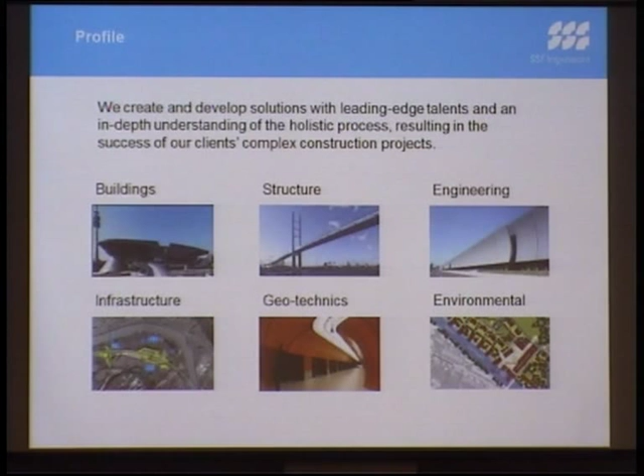These are very important markets for us. As I said initially, we are working a lot in traffic infrastructure. And for these emerging countries, I think this is one of the important facts for an upcoming country. When the economy is rising, the requirement for traffic infrastructure is an important issue. And that is why today it's very interesting for us to work in these countries.

What kind of services are we providing? We are providing services of construction from the very initial phase, so feasibility studies in the very beginning, to all the phases of a project, to finally implementation design. We have some special issues, as I already said, traffic infrastructure, geotechnics. Today also building information modeling is a very important issue for us, and check design.

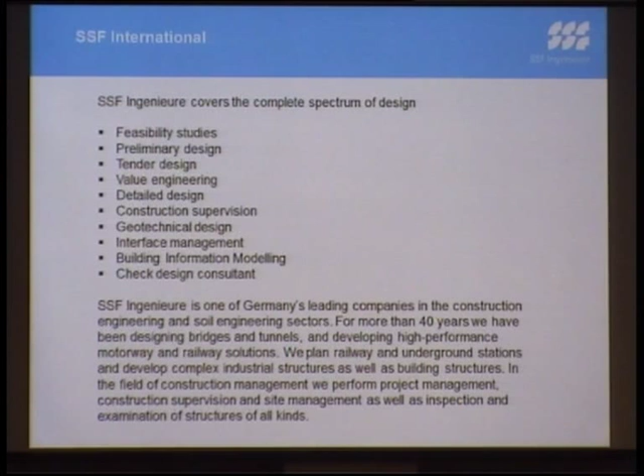And the way we are working today is in a kind of a network. We call it SSF Group. We work together with a lot of partner companies, locally in Germany, but also worldwide. We have subsidiaries today in many different countries. There's China, there's Greece, there's some of the Eastern European countries where we are situated.

And that is what we realize today is the best way to offer service to our clients, that we have a network, we can work in all disciplines of engineering, working together with local companies, also with local companies here in Russia. That is also a very big and important point for us, to realize mutually, so together with all these partners, our projects, and to supply to our clients a good service.

Now, we'll come immediately to the projects we're starting, and there I will hand over to my colleague immediately. We're starting with underground structures.

Okay, now I will show you some underground projects from SSF. The first project is two subway stations in Delhi, India. We did the design for the two stations, Malviya Nagar and Hauz Khas. The client was the Delhi Metro Rail Corporation, and the construction costs were about 120 million euro. Our services were the preliminary design of the subway stations, the definitive design of the subway station, and also the construction design of the subway stations.

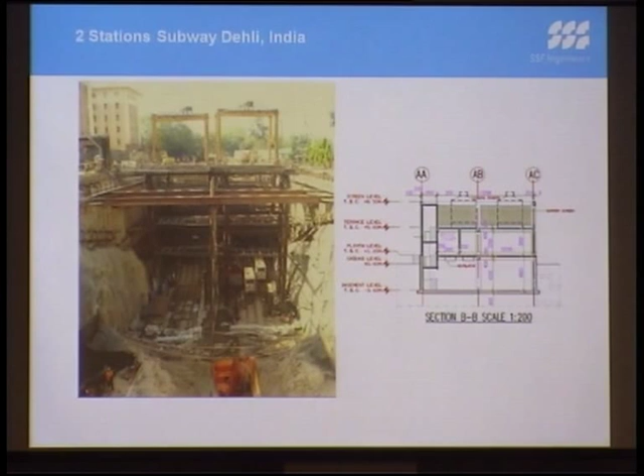Now the metro station Marienplatz in Munich, Germany. It's an existing station where there was a widening of the platform level done. It's very central in Munich, so there are a lot of interfaces with other structures. The main problem was the historical building on top of the underground station, and we had to be aware that deformations don't rise too much during construction.

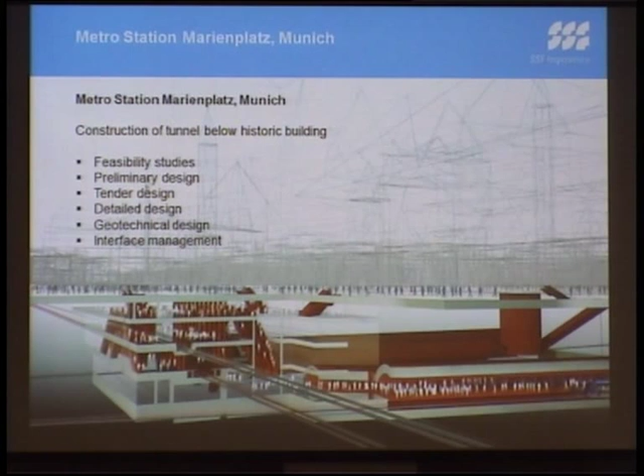Here on the top you see the widening platform, the new structure, and again the historical building on top. Under the underground you see the pilot tunnels. We had to make some pilot tunnels for the soil freezing, to freeze the soil on top of the platform widening to get lower deformations.

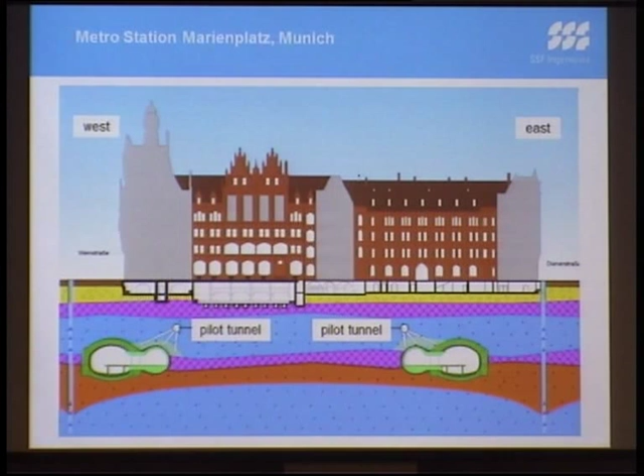Here again the structure. The Munich City Hall is the historical building. There was a start shaft done, you can see it on the right side. Then the pilot tunnel for the soil freezing, and then the soil freezing was made.

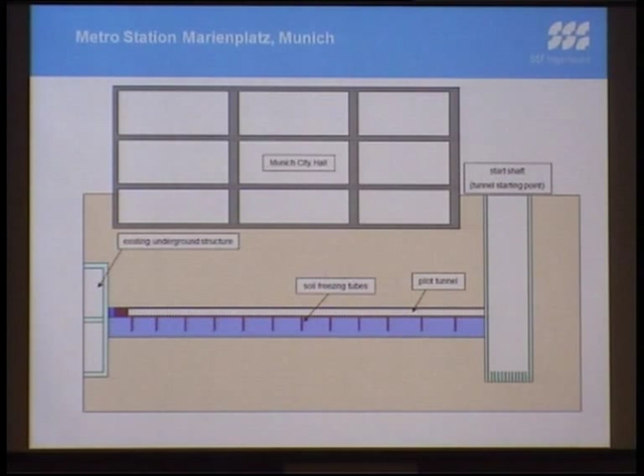You see it hatched in red now, and then under this soil freezing they excavated the new platform, the new widening of the platform.

And here you see now all the breakthroughs. The breakthroughs are from the widening platform to the actual platform level. This is now the final state, how it looks today. This is the widening platform, and behind these black breakthroughs is the actual platform level of the underground line.

The construction costs were about 25 million euro.

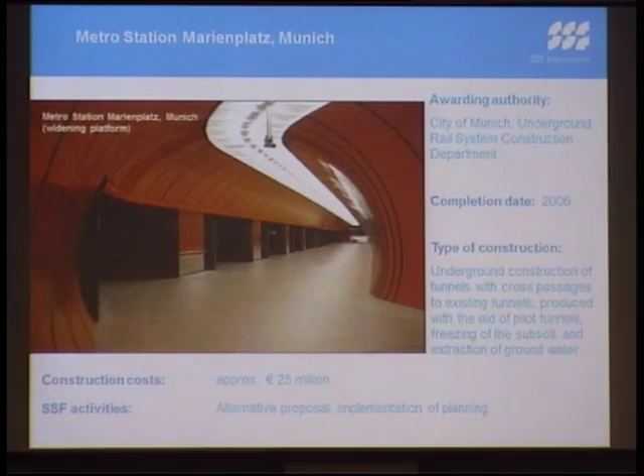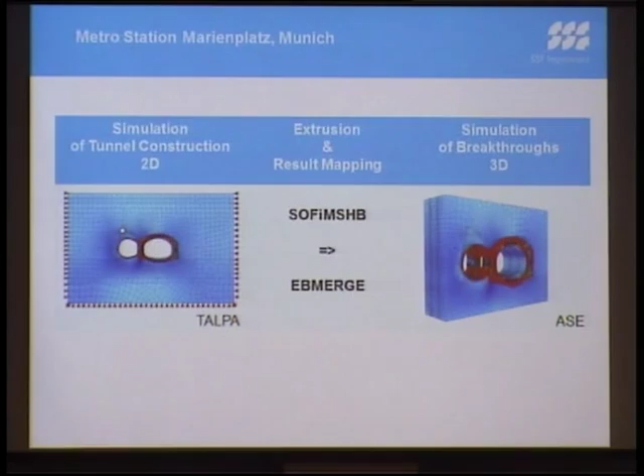First we made a 2D model with Talpa, a 2D section of the tunnel to see all the 2D problems. But when it comes to the breakthrough, it's a 3D problem, so we had to extrude it in 3D and see all the stresses in 3D. This you see on the right side.

Now the model, here you see the part in the middle and the construction phases: first the cuts, the breakthrough, then the new concrete around, then the column in the middle, then the next breakthrough, then the concrete structure, and then the final state.

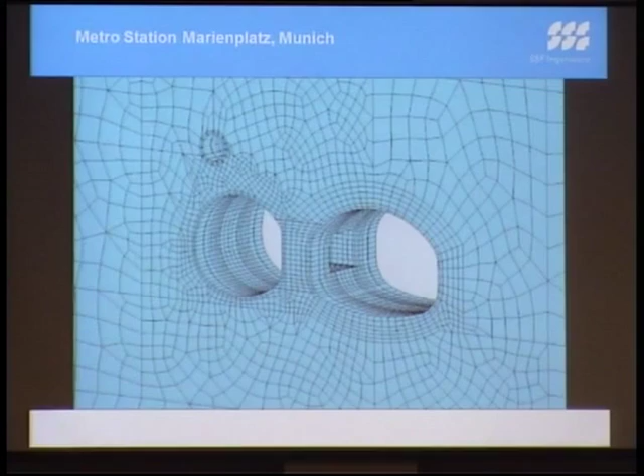On the left side, on the top, you see the pilot tunnel for the soil freezing of the widening platform. Here you see the breakthrough in the construction phase, and on the bottom you see the widening platform marked in red.

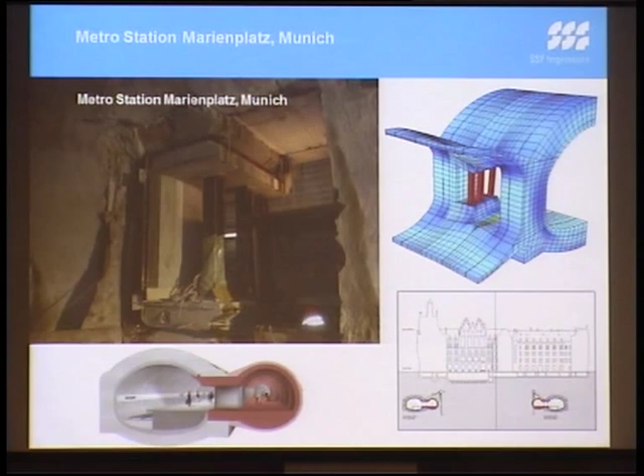Okay, now the last underground station. It's an underground station in Algiers, the station des Ateliers in Algeria. This is a more recent project that we are currently working on. We model this now with Revit, which has the interface to SOFiSTiK.

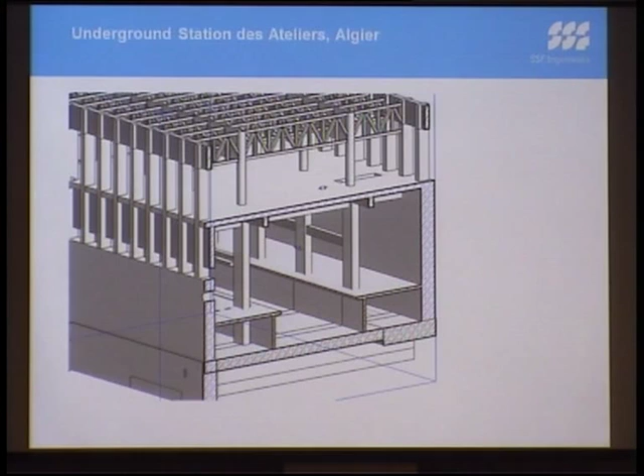You see it also on this screenshot, on the next slide. It's very nice that you get immediately cross sections. As you can see here, you just shift the mouse and you see the cross section of the station, and out of this 3D model you get the drawing. Of course you have to add something, but you have the main cross section from this model.

And with this model you can also make the calculation immediately, so it's all in one. You see SOFiSTiK is also implemented in this Revit 3D. On the top you see the SOFiSTiK button; you just push the button and you can export the whole 3D model to the SOFiSTiK calculation. If you make a change in the Revit 3D, you get immediately the change in your calculation too. It's the so-called BIM system, the Building Information Modeling.

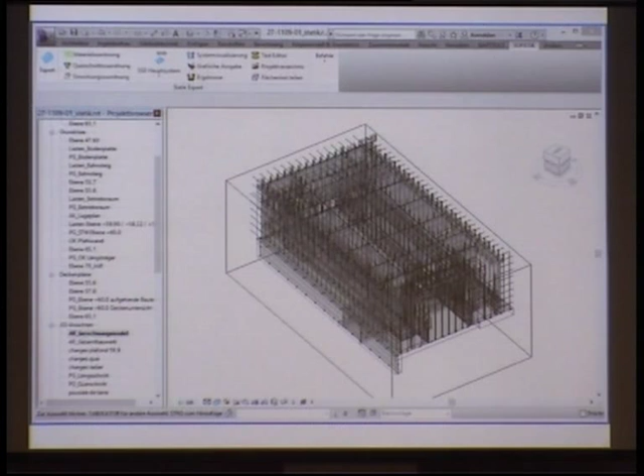Here you see the animator. It's exactly the same model, just exported to the SSD. Here you see some screenshots of the station.

And here again the interface. It's Building Information Modeling, as I said. You have this one 3D model, and out of this one 3D model you can export formwork plans and structural analysis. If you make changes, everybody sees the changes. This is the idea of Revit.

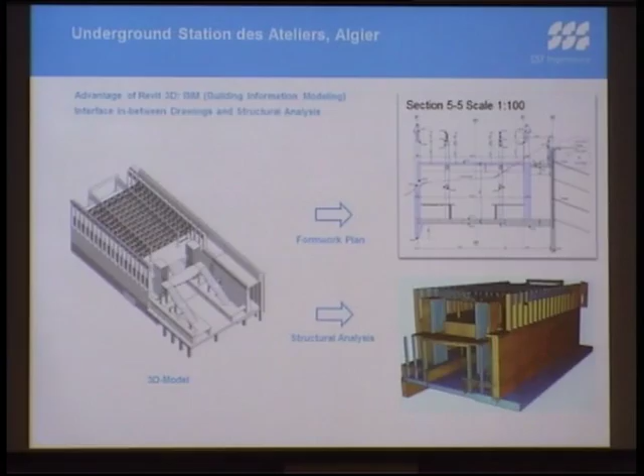Here you see also a short video just to show how the model works.

This is now the normal SSD, the standard SSD from SOFiSTiK. You can use all your features that you have in SOFiSTiK. You can also add something that you don't have in Revit if you want.

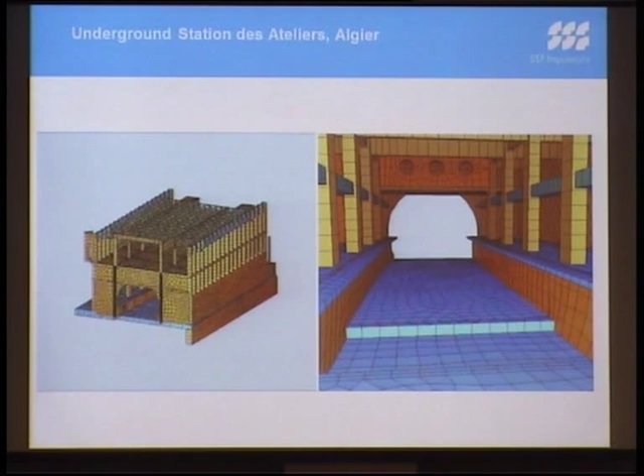And now I come to the tunnel project. The first tunnel is the tunnel in Gdansk, Poland. We made the feasibility studies, the preliminary design, the tender design, the detailed design, the geotechnical design, and the interface management. I don't show you all these different phases, I just show you a small analysis about the deformation of the tunnel that we also did.

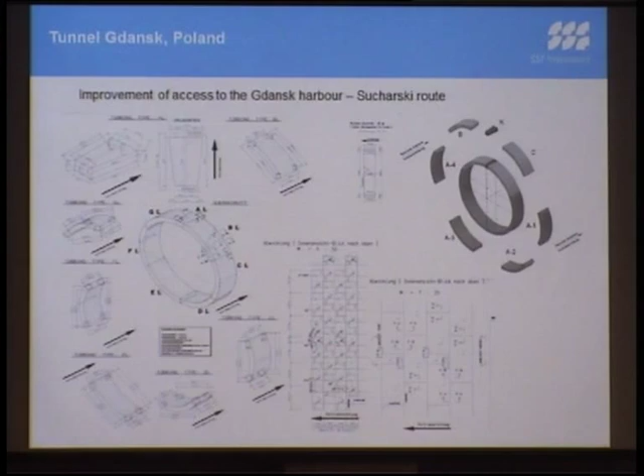These are the analyses we did with SOFiSTiK Teddy and with the software WinTube 3D from Fides. It's a special software to get 3D tunnel problems solved. Here you see the main problem of the tunnel. It's a tubing tunnel with segments, and all the rings are a bit shifted to each other, so the joints of the different rings are not in the same place. So it's not very easy, or not possible, to get a clear deformation just with a 2D section. It's better to analyze a 3D section.

Here the model on the bottom, and here the problem again. We have some vertical springs, and here the rotation spring. This is one ring, and on the next ring you see that it's of course shifted. To get the deformation of the whole tunnel, of this whole structure, it's better to analyze a longer part of the tunnel to see how it reacts, how the vertical springs act, and how the rotation springs act. Therefore, we did this in 3D.

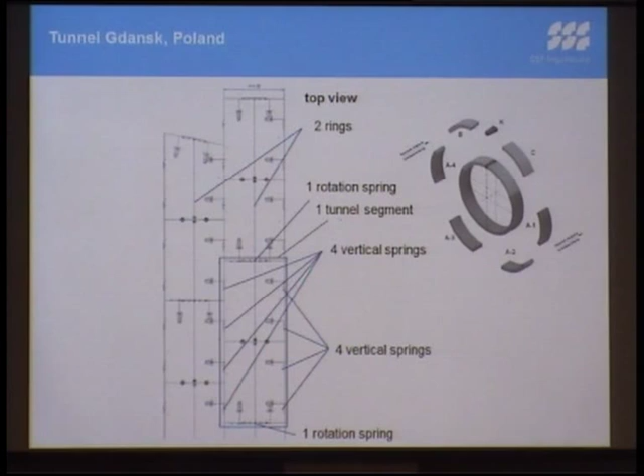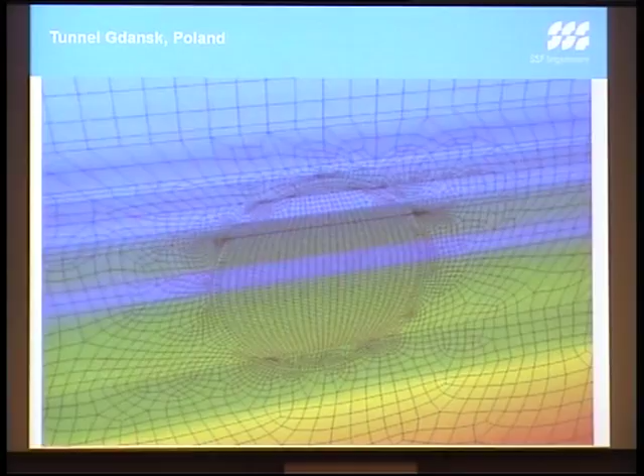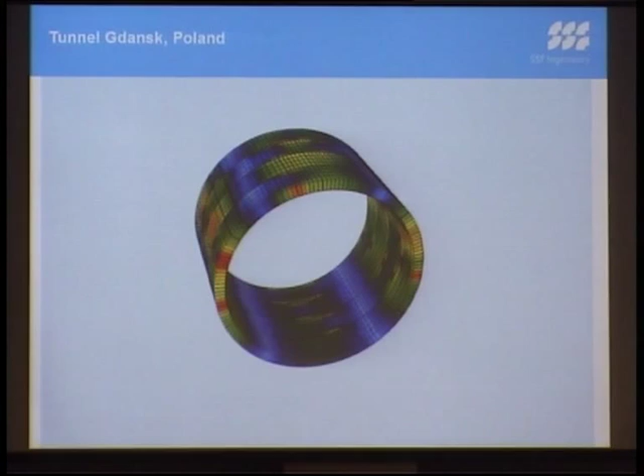You see again a short video. Here, this is just the soil, then the tunnel. Then you see the tunnel in the middle here, and then just the tunnel to show how it looks like. In the middle of these tunnel rings, you see the four rings. In this case, there are these gaps with these springs, and all these springs you can then also change and vary in SOFiSTiK in Teddy. You can use Teddy directly to change and analyze all these springs and the deformation, of course.

Okay, so now Sendlinger Tor. It's also a current project. It's a redevelopment of an underground station. Here you can see the existing station, and here the metro tracks. And here on top you see the new structure. There has to be done some new entrances because of fire and safety reasons, because it's also an underground station in Munich where there is a lot of traffic, so they need more entrances and exits. Here there will be two new entrances.

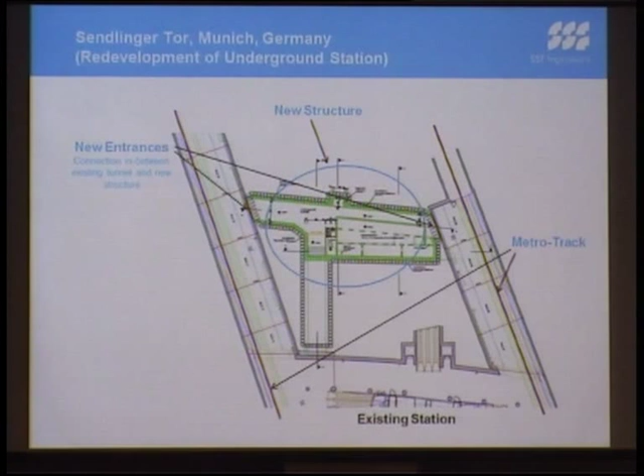The SOFiSTiK model calculates the whole new structure, but I just show you now this small part of our calculations, just this breakthrough from the existing tunnel to the new structure.

In this case, we also modeled the 2D model in Talpa to analyze all the historical construction steps to get all the frozen internal forces in the inner lining. Then we took the radial spring forces from the 2D model and put it as a load to the 3D model. So we have considered all the construction steps before in the 2D model, and we have it all in the 3D model too. And then in the 3D model, we did the breakthrough.

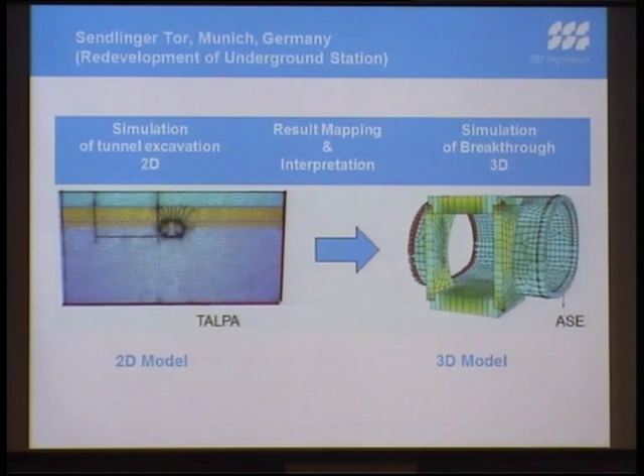We will also use soil freezing on top of the tunnel to get the breakthrough watertight. There we have the problem that the soil freezing causes expansion, and this expansion is very bad for the existing old tunnel structure. We had to analyze that the inner lining from the old existing tunnel carries the load of the soil freezing.

The soil freezing is also modeled in SOFiSTiK just with temperature. We used a rise of temperature to get this deformation because of soil freezing. And then we also changed the material in this area, the E modulus, regarding the frozen soil—it has a much higher E modulus.

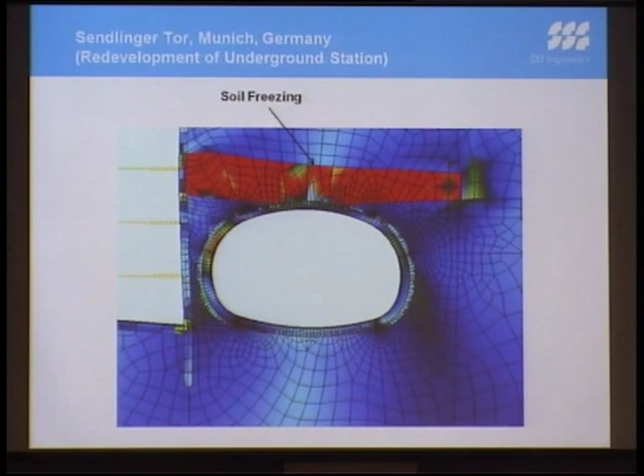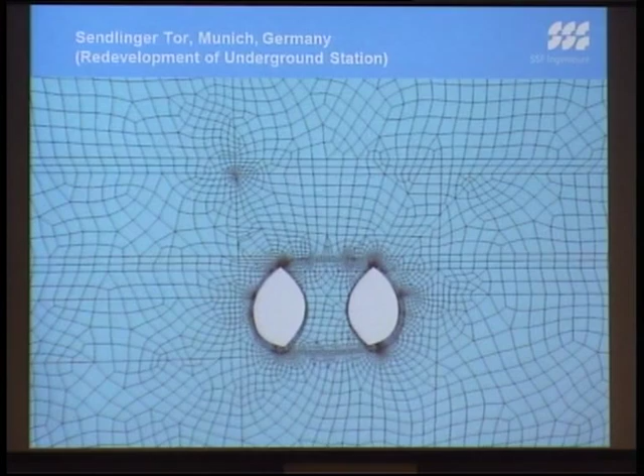Here you see the video of the 2D model. It was done in NATM. It's 40 years old, the tunnel. So this is an old structure, but we still considered also the old breakthrough of the old tunnel to have all the loads that are inside the inner lining. This is now the outer lining, and then the inner lining comes. And this is now the new excavation pit that we are doing now.

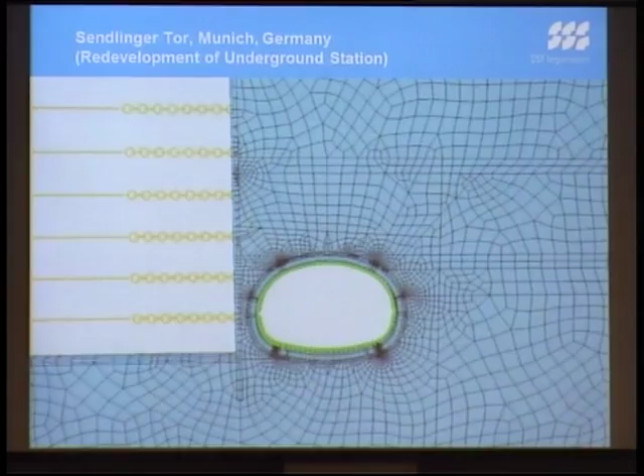And now you will see the soil freezing, and then the breakthrough. This load case, or this construction phase, is not possible to analyze in the 2D model. It's just shown here to illustrate it, but we didn't analyze it, because this is not possible in 2D. Therefore, we now use our 3D model.

This is the 3D model. We have now all the loads of the 2D model on top of this 3D model. You see the deformation on the model. And here we made a breakthrough in 3 different steps. This is now the final state of the new tunnel.

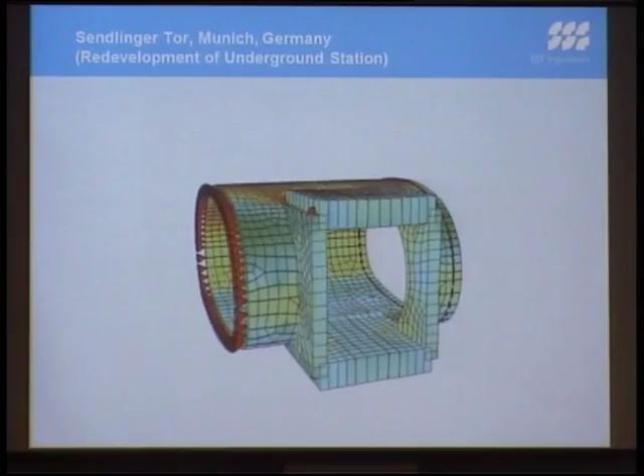For the 2D, we used TALPA, and we used also the CSM, the construction stage manager for geotechnics. So you write an input file, and then SOFiSTiK calculates automatically the different construction phases. In this case, for example, the soil freezing, it's not so common, and therefore you cannot put it immediately in the input file, but you can write it manually after you have calculated all the construction steps. You can also put it manually inside the model and calculate it again. So it's very useful to have also TEDdy, the text input, to make some individual changes on the model.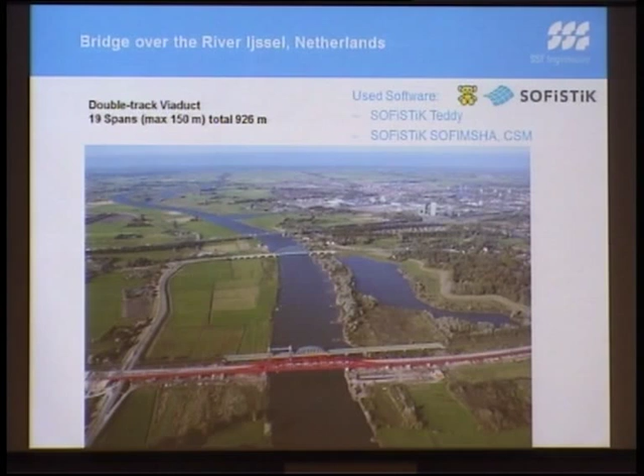And well, as you can see, there's a midspan in a very specific architectural style. The midspan is about 150 meters wide. There are 2 side spans with 75 meters, and then in total there were 19 spans for the whole bridge.

Yeah, well, this was a competition that initially started as an architectural competition. The architect is Quist Wintermans from the Netherlands, a long-term partner of ours, so we are in quite good contact with them. Already from the very beginning of the project, we were working together with him to mutually develop the design of the bridge. So over several stages, like for a bridge competition, we do develop the design.

The initial architectural idea was to adapt the design of the bridge as good as possible to the Netherlands environment. And as you know, the Netherlands is very flat, I think the highest mountain is something like 60 or 100 meters high. So we really tried to stay very flat for that bridge and not have a very high pylon. As you can see in the initial design, there were some pylons, but then very soon we decided that it must be a very smart and smooth shape. And we finally came to the solution of that arched truss structure - a round curved shape, including an arch, not being very high, so as not to overcome the terrain around it.

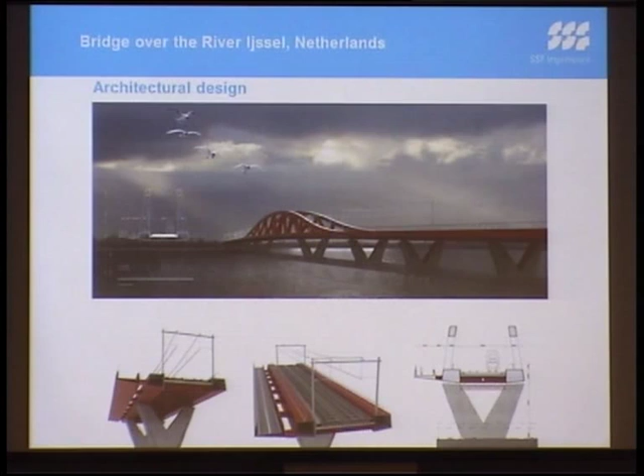In addition to the rail bridge, you can see there's a footpath on one side, which is just cantilevered to the bridge. This competition ran over several phases, and finally we had the chance to develop the project together with the architect, and then later on with the construction company, Züblin and Donges in that case, to run the project and go through the implementation.

So we had the chance to go through all phases of this project and participate in all of them. Now just seeing the alignment, you see the approach bridge on one side slightly curved, but the rest of the bridge is almost straight, although the vertical alignment has no very steep ramp going up or down. So it's a continuous girder from the structural point of view over the whole length. There are only expansion joints at the very end of both sides.

Maybe I should also mention that on this bridge, in addition to the high speed, which requires very small deformation and thus very high stiffness for the structure, we also have a switch, a turnout. For high-speed turnouts it's impossible to have any joint there. So the whole bridge is only one girder running continuously over the 900 meters.

From the structural point of view, it's an arch, but if you look closer you'll realize the arch ends in the middle of a span, which isn't typical logic for an arch. It was an architecture competition, we had some influence, but this is still a bit strange. As an engineer, though, you find a solution to handle this.

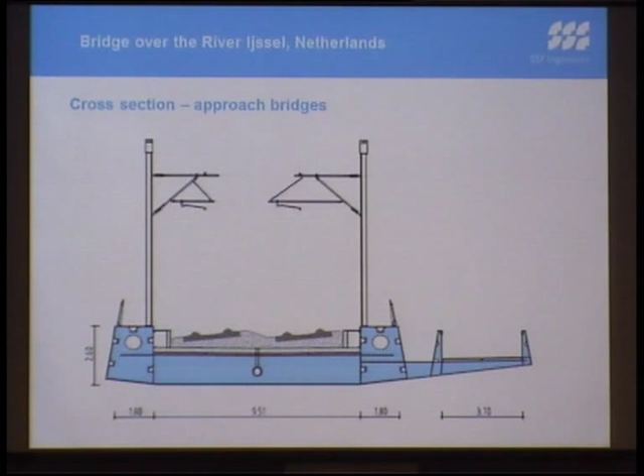As I said before, on one side there's a cantilevered pedestrian bridge, which works the same way: there's a concrete deck and two longitudinal steel box girders.

Now, the main section of the main bridge, the cross section there, in addition to the two longitudinal box girders, we have these truss arches, with an upper chord, the diagonals, and the lower chord.

When it comes to modeling this bridge, as we heard before, the initial step is understanding how it works, which is what I explained earlier. It doesn't really work as an arch, as you can see, because the end of the arch is in the middle of a span. It works in a different way.

You can imagine these diagonal parts are very highly loaded. They are steel plates, 80 millimeters thick, to take all the stresses. This is a very big part of the load going down there.

For the modeling, it's a bar structure, so it has been modeled as a bar structure, in this case with SOFiSTiK SOFiMSHA. In addition to the bar structure model, we added a finite element mesh for all the nodes, in order to take the correct stiffness of these nodes into the whole system.

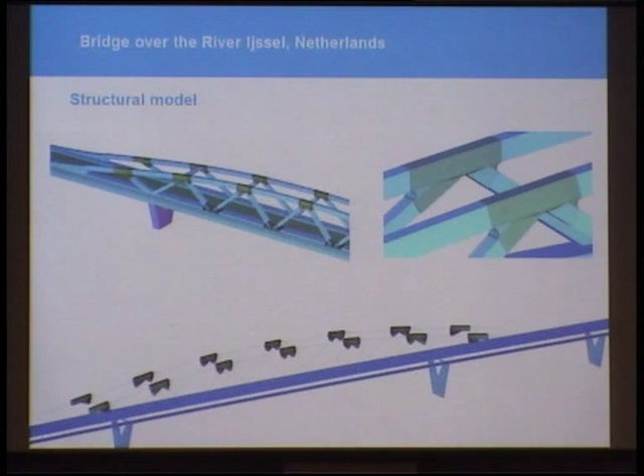On the other hand, this kind of modeling also has the advantage that for the local dimensioning of every node, we get the internal forces from the whole structure automatically out of the system, and can then apply them to every element.

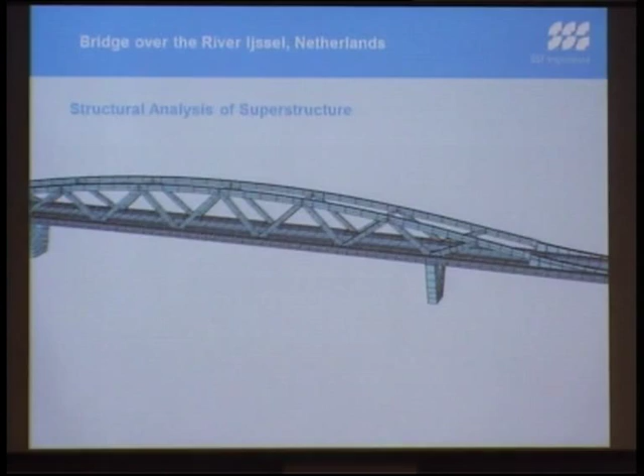That's how the total model works. In the first step, it was modeled without taking into consideration every single node. Then the model was recalculated, taking into account every single node as a finite element calculation, giving all the internal forces and stresses at every node.

As you can imagine, for these kinds of bridges, construction stages are also an important issue. For the approach bridges it's not too complicated - you can prefabricate the steel structure with a crane and weld it on site.

But for the central part, 150 meters of span, that section was prefabricated onshore, then put on barges, floated into the right position, and then pulled into the correct position with hydraulic jacks. All these construction stages were also calculated in the SOFiSTiK model using the construction stage manager.

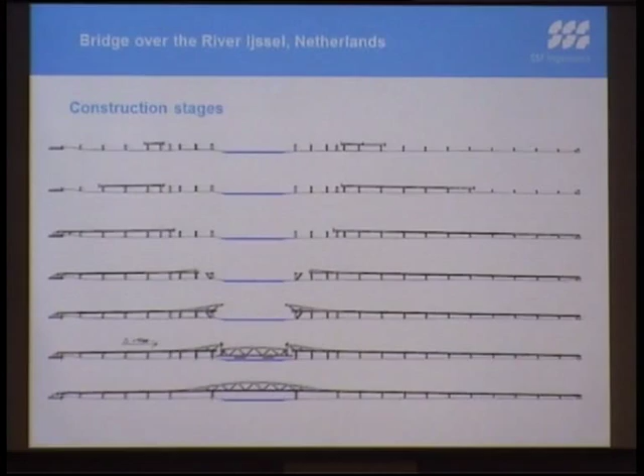This is how the final closure of the middle gap looks. It's a huge thing to see how this works in reality, as we had before. It's not only modeling - when you really see what happens on site, it's a different scale, and it has to work. You have to be sure that all the forces are correct.

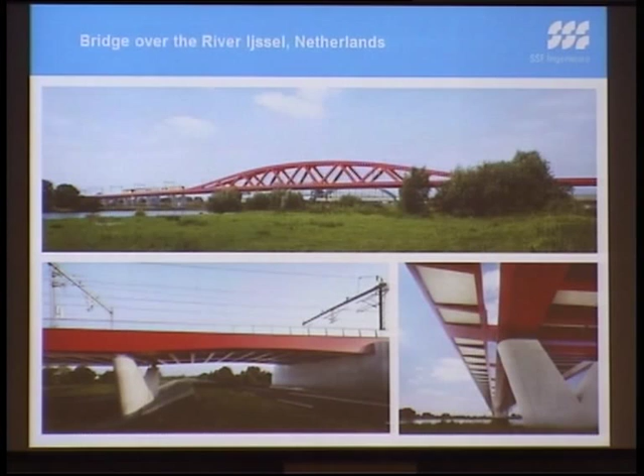And that's how it looks in the final stage. I think it's a very nice, interesting project. In the end, SSF, together with the whole consortium, won a prize for that bridge from the Netherlands, the National Steel Prize.

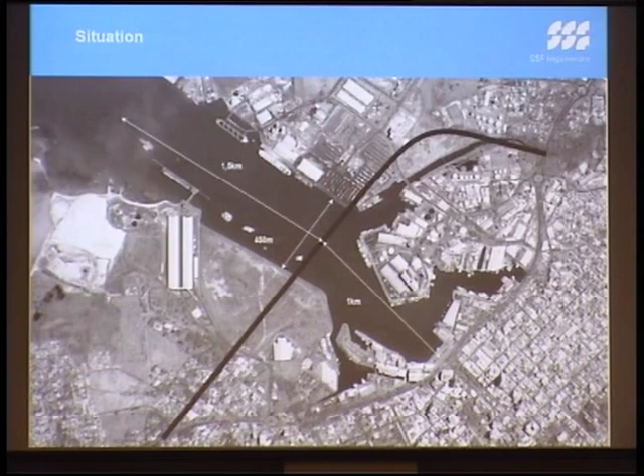I will immediately step to another important bridge project. This is now on the island of Mauritius, at the crossing of the harbor of Port Louis. Here we have downtown Port Louis. It's not really a very big village, but it's the capital of Mauritius. Right now the main road is passing through the middle of the city, exactly at the seafront where you normally want pedestrian walkways. But right now there's big congestion, a lot of traffic, and everything is blocked in the morning and evening. So the project was initiated to have a bypass crossing over the harbor.

A crossing in the back was not possible because there are huge mountains, and you would need a tunnel to get there.

In addition to the constraints from the environment, there are nautical restrictions. We have to have an open corridor with a height of 50 meters for big ships passing in the harbor, and a width of 270 to 300 meters, something like that.

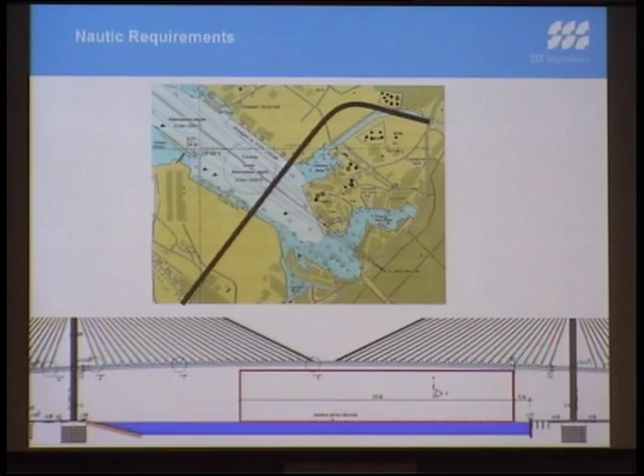So the chosen solution was a cable-stayed bridge, with one harp of cables, one layer of cables in a semi-harp pattern, and a diamond-shaped pylon.

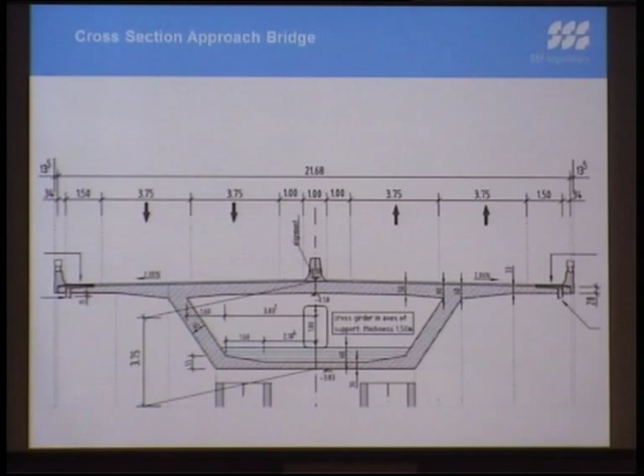For the 3 different sections of the bridge, we chose different cross-sections: a standard box girder in reinforced concrete for the approach bridge, a standard system. Then for the main bridge we have 2 parts: the back span, where we need quite a lot of weight to counterbalance the midspan.

For the midspan, we also chose concrete, which is a little specific for this type of bridge. Concrete is quite heavy for half a kilometer of span. Of course this is quite a challenge, but this choice had to be made because of the boundary conditions on the island of Mauritius.

I don't know if you know it, but it's about 80 kilometers wide and 40 kilometers long, so it's really a small island. On that island, everything you want to construct in steel, you have to import. And there isn't any contractor on the island able to handle steel or produce steel elements. So if it were done in steel or composite, everything would have been imported and produced somewhere else. So the choice was made.

We will do it in concrete, even if for half a kilometer of span this is quite a heavy solution. We try to reduce the section as much as possible. As you can see comparing the sections, we wanted the back span heavy to avoid uplift, while on the front span we reduced all sections to the minimum. In addition, we have internal steel elements on the inside to take tensile forces and distribute the load over the width of the bridge.

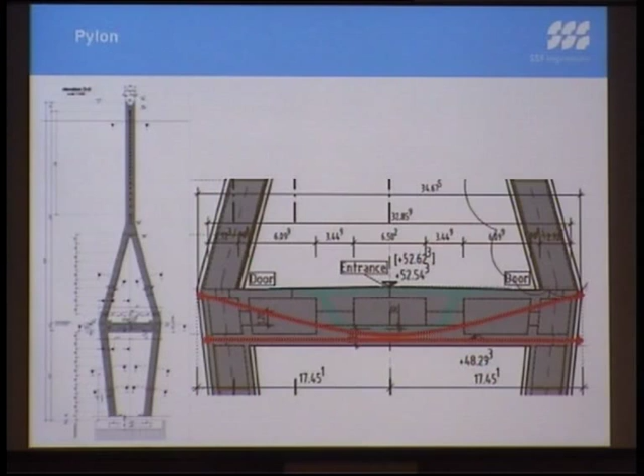Now, how it was modeled: this project was modeled very basically at first. In the beginning we had a star model from SOFiSTiK. Then we changed over to SOFi MSHC, where we had the chance to directly model the shape of the bridge following the alignment of the road.

A very specific and interesting point with cable-stayed bridges is the form finding you have to do at the very beginning, because if you installed the cables at their initial length, you would get very large deformation due to dead load. So you have to tension and pre-tension every single cable to put the bridge in the correct position and achieve equilibrium of forces.

For that bridge, as it is internally and externally statically indeterminate, being an integral bridge, this iterative process was pretty complex. There's a module in the SOFiSTiK software with an equation solver for these kinds of problems. But as this was very complex for this bridge, we initially used that solver, but then later on manipulated it a little by hand and did some iteration to get the best distribution of the internal forces.

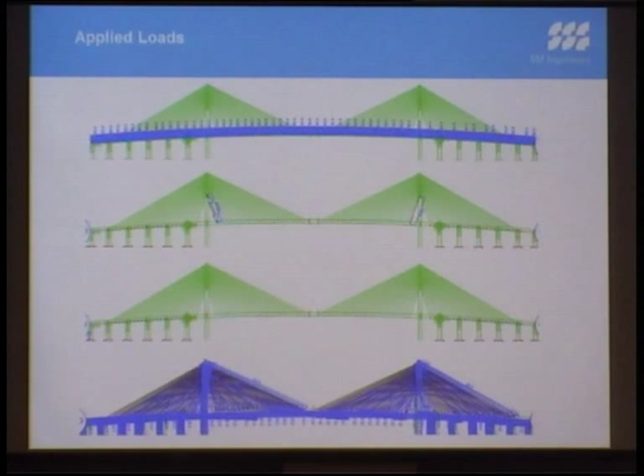Then, of course, loads have to be applied. There are dead loads, tensioning forces of the cable, settlement of the piers, temperature, and of course traffic load. We ran over the whole bridge to finally get the envelope of the moment for the bridge deck as well as for the pylon.

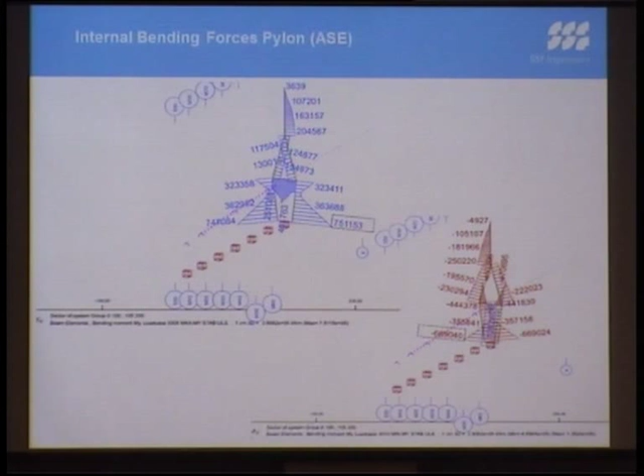If I just go back, you will immediately realize that here at the connection between bridge deck and pylon, there's something very special. That is exactly what I said before: we have an integral bridge with a direct connection, so there is a bending moment going from the deck to the pylon, which you would normally not find for a cable stayed bridge with a bearing.

The second big challenge for cable stayed bridges are the construction stages, because this will be erected step by step. In the beginning, just the approach bridges, and when you reach the pylon, everything will be erected in free cantilevering, putting always one cable, one segment, one cable, one segment.

In order to achieve the correct position of the bridge deck with the correct stresses in the cable that we calculated initially with that form finding process, we have to do a back analysis. So we deconstruct step by step every construction stage backward, taking off every cable and section to find out which force we have to introduce in every single cable for the construction of the project. There, the construction stage manager of SOFiSTiK is very helpful, because you can automatically do these steps backwards.

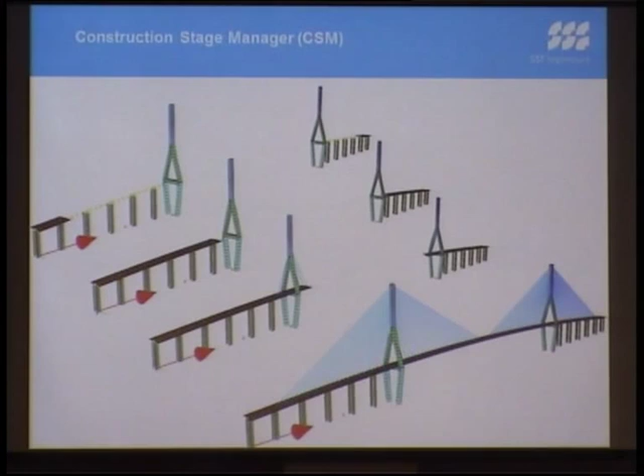This project has also been done together with an architect, and we are now at the process where these documents are handed in to the client. It's a tender process where the project is mandated to the client, and we hope to be able to continue this project also for the construction.

Maybe just one specific remark: by the cooperation with the architect, suddenly we had a restaurant on our pylon on the very top, at 110 meters height. It was something new for us, but I think it's a good thing to valorize such a bridge. It's probably the first bridge that will have a restaurant on top. If this will be constructed and carried out like that, I'm not sure, but we will see. It's an idea to have also a touristic effect for our bridge.

Well, I will close the bridge part of our presentation now with a look inside a little bit of our Chinese projects. We have been carrying out a lot of projects in China during the last year, doing a lot of consulting work over there, and this is one of the projects: a big bridge over the Yangtze River.

The name is Dezhongguang Bridge. For me, it's still impossible to pronounce it the correct way, and Chinese people always start laughing when I try to pronounce the name. That's why we in general just call it the Big Bridge.

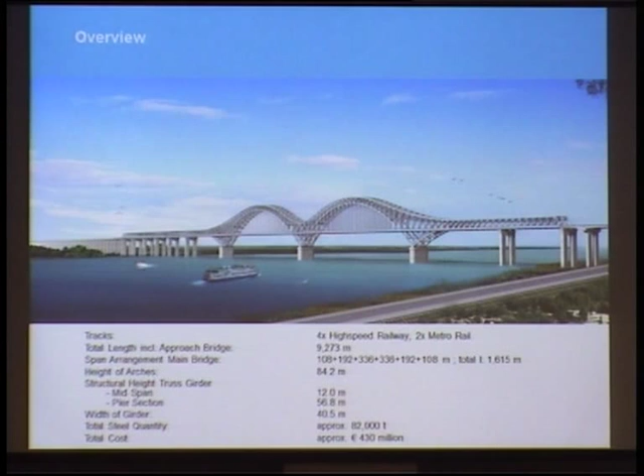So when it comes to modeling, well, of course, it's a truss structure - an arched truss structure. We don't only have one layer of these, but we have three. There's one on both sides, and in the middle another layer. On the diagonal view of the SOFiSTiK model, you can already have an idea of this.

But when it goes into detail, of course, we have all the diagonal reinforcing bars between the layers. So you can imagine for this bridge how many bars are in there and how many input data had to be handled.

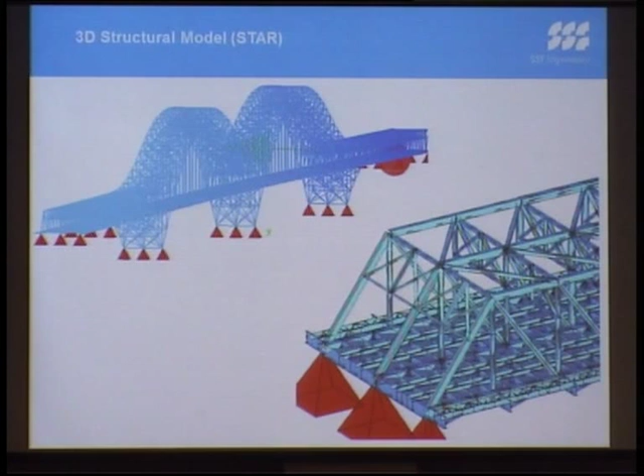Finally, we had four main consulting tasks for the bridge. The first was a stress analysis to assess which of the bars are at their limit, if they're plastified. Of course, we had some bars which were plastified in the final stage, close to these middle piers.

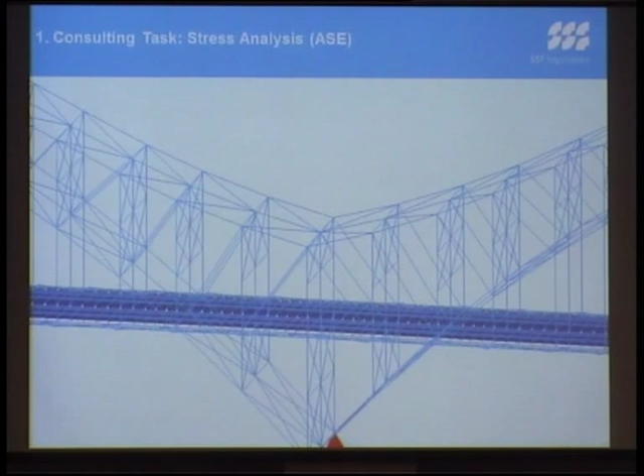You can imagine the big forces from 336 meters of 4 lines of high speed. You will collect a lot of forces, and so there were some bars which were not able to carry the load, but they just had to be exchanged by a bigger profile.

Another consulting task we had to carry out is assessing the construction phases. There we were really very surprised because our Chinese colleague told us they were just calculating that bridge in final stage.

They just entered the model in final stage, and didn't consider at all construction stages. And you can imagine, for free cantilevering the 330-meter arch, so it's 160 meters from each side, there are enormous forces.

They finally had to be handled with temporary pylons and cables to enable this work.

And it's not only the stresses that will occur during construction, but it's also a big deformation you will have. And so that was very, very surprising for us.

They just said, well, we calculate final stage, and when we have a deformation at the end of construction for closing the gap, we'll just put hydraulic jacks, jack the arch back in the initial position without any loading.

And then we put the last bars in the middle and we connect it. And that was the idea how they intended to finalize the arch.

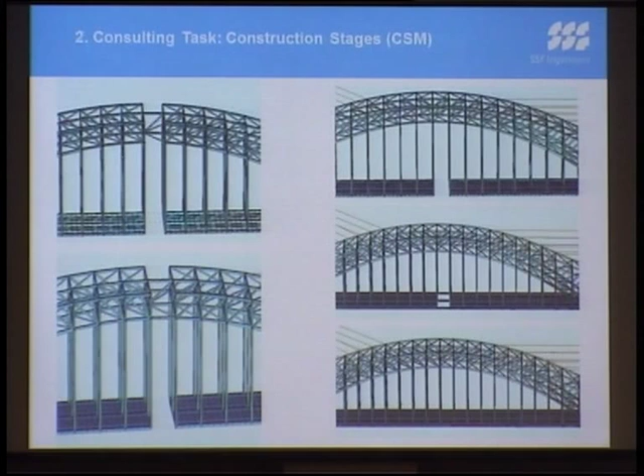We had another solution. We just proposed, okay, put away for the free cantilevering your bridge deck and your hangers, so you save already half of the dead load, and then you just install these elements later on, because otherwise you will not manage to handle this project.

Further investigation has been done with the bridge deck itself, because the bridge deck was on one side an orthotropic deck, steel deck, and then on top, for carrying the ballast, there is a concrete deck. So these two are working together.

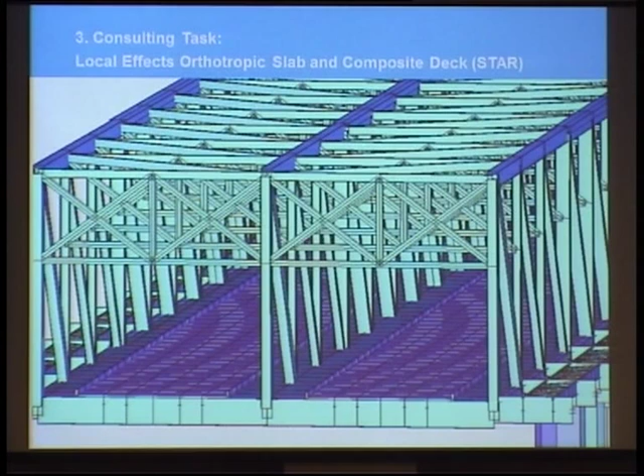In order to have the right stiffness for the whole system, we also had to introduce the concrete deck and the orthotropic deck in the total model to verify all the deformation in the correct way.

A second task we had to handle with the deck is the fatigue analysis. In that case, in cooperation with SOFiSTiK, we got the load model for the newest Chinese high-speed railway.

The CRH3, something like the ICE3, the European high-speed train, German high-speed train.

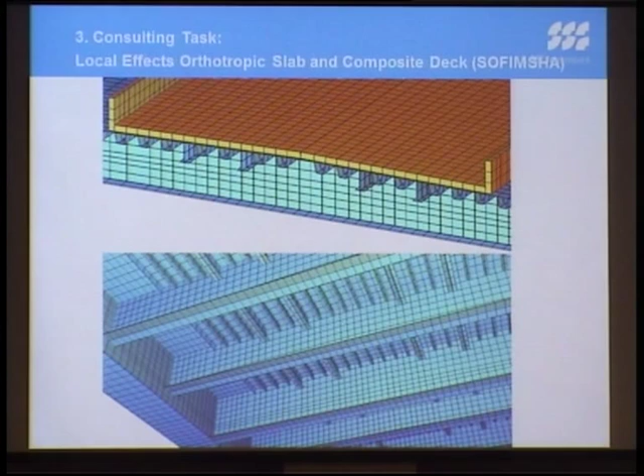And then we carried out analysis of this composite deck just for one section, where we ran over with that load model, and we assessed the stiffener and the fatigue of the stiffeners.

The final task we had is just assessing the dynamic loading of this bridge. There was earthquake - we are just putting here the eigenforms of the bridge, and then the Kármán eddies for the hangers.

As you can imagine, these hangers have a length of 90 meters, and with a wind-induced swing of these elements, there will be also very high loading for this element. So the dynamic analysis was finally also carried out for this bridge.

And as SSF, we had the chance to be also involved in supervision on construction site. So we could always follow during construction what happened on site.

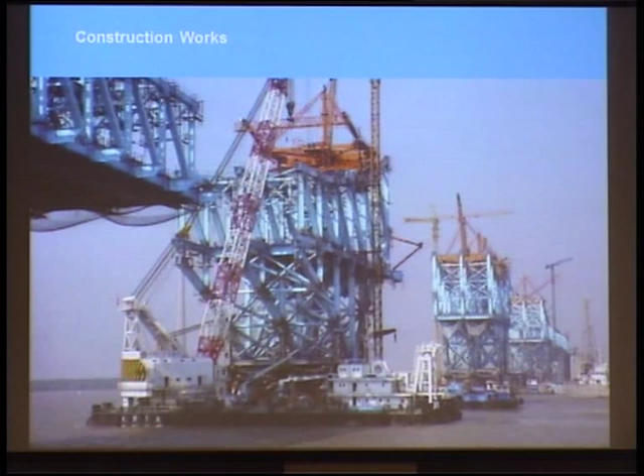Now we get again more into detail with one specific dynamic analysis that has been carried out by Max for noise barriers for high-speed railways.

In the underground projects and in the tunnel projects, we use SOFiPlus with AutoCAD, so we can draw it in AutoCAD or in SOFiPlus. In this case I prefer normally to use SOFiPlus because it's easier to understand what you are doing. But for noise barrier walls, I always use TEDDY because it's very complex and you really need a clear definition of all the nodes and all the structures, because you cannot see exactly where the loads are going.

It's very useful to use TEDDY in this case, and the structural system is not so complex to model in TEDDY in text input. So we have these advantages that we can use variables, loops, and comments. Here you see a screenshot of the text input on the right side.

First, let me explain very shortly the general theory. When the train is passing by the noise barrier wall, it causes this pressure. On the top in this image you see the pressure: at the front of the train there is a high peak, in the middle there is a peak, and at the end there is a peak. These peaks cause high pressures.

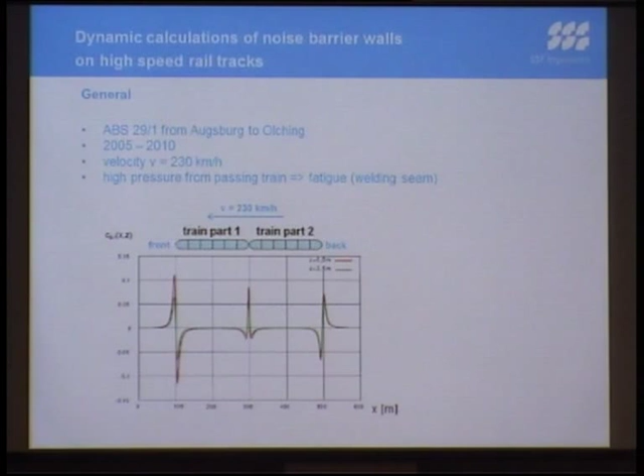And we especially have problems in the welding seams, because seams are not as strong as the normal steel material.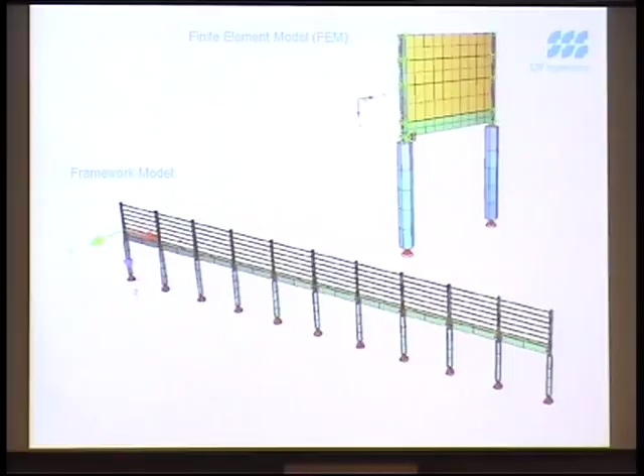As I said, the deformations were very high. Here you see the strut and tie model on the bottom, and the finite element model on the top. Sometimes we use finite element and sometimes strut and tie, depending on the question. And here you see the calculation on the right side, and in reality the deformation.

I'll show you the video again. You see that the deformations are very high, also in reality—it's some centimeters that the noise barrier wall moves because of this high pressure of the train. And you see that the calculation and the reality are very close to each other.

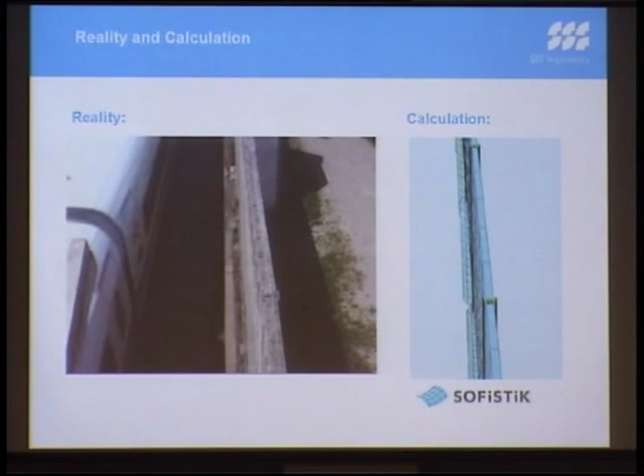Okay, and now this is the output of SOFiSTiK. On the right side you see the diagram, and the movement on the left side of the noise barrier wall. You see that all the peaks are registered, and you can use this later to calculate the actual lifetime of this noise barrier wall.

With these loads, we put them into SOFiSTiK, in Dyna of SOFiSTiK, where we can also consider the time. With this load case, as you can see on the bottom, you get completely different results depending on the eigenfrequency of the noise barrier wall. Noise barrier walls in soft soil have a low eigenfrequency, so you have this behavior on the right side, with a lot of post-pulse oscillation.

You have a lot of movement after the train passed by, and because of all these peaks after it and before, you have a lot of peaks, and you have to summarize all these damages that are caused by all these peaks. So in this case, you really need dynamic analysis to say exactly how long the lifespan is of this noise barrier wall.

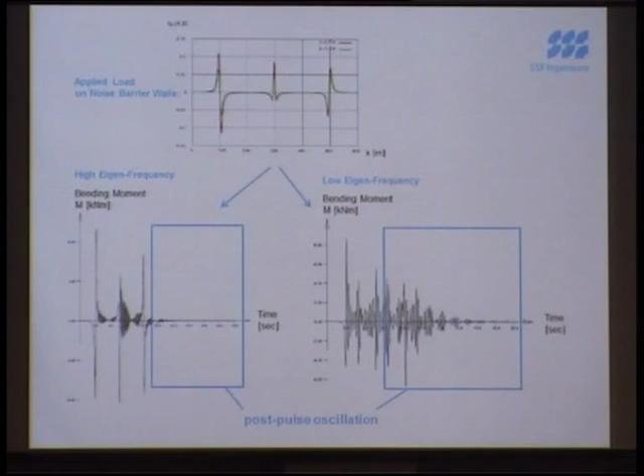For the footplates, we used also SofiPlus to analyze the stresses in the footplate. From Dyna, we get the loads. We put the loads on top of the steel construction, and then we get the stresses here in the footplate. For the anchors, we put some springs to analyze also the anchor forces.

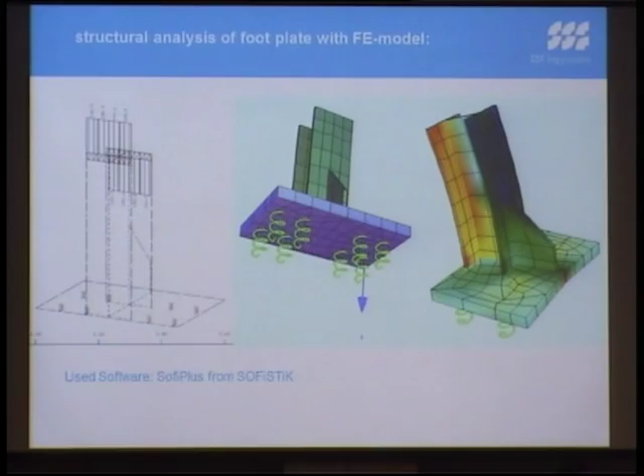Okay, that was my part. Now I hand over to Jörg again.

Thank you. I hope we still have some time. I'm not sure how we are in the timing. Is it okay? Five minutes I get. Okay, so we go quickly for the last part, which is considering arenas and big stadiums.

I will start with one very well-known building, at least in Munich and in Germany. Unfortunately, it's not well known because of our engineering, but because of what is inside, which is the delivery center for BMW's cars. However, today I will not focus on the cars, but more on the structure of the building, which I think is as interesting as the cars underneath.

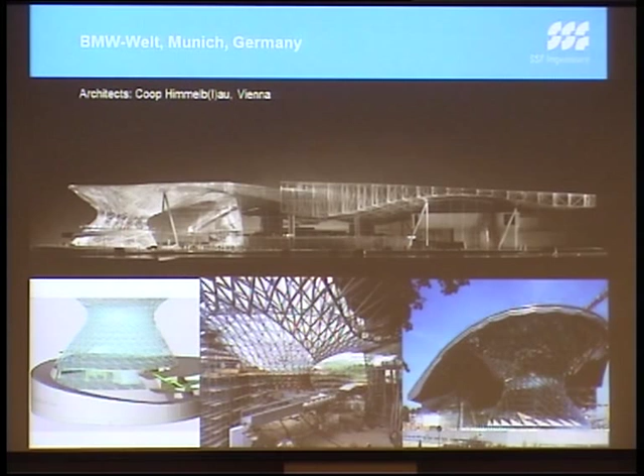The design of that building, well, you can't really call it a building - it's a big stadium, a big hall constructed with this. The architect is Coop Himmelb(l)au from Austria. The building is subdivided: of course there's the big roof on top, which is kind of floating over the whole thing - that's also the architectural idea. And then on the left side you have this double cone, which is also a very complex structure, complex shape.

It's better to see in this cross section: underneath there's a huge concrete structure, which is more like a traditional building. But as you can see, more than half of the structure is underground, and only a little part comes up. They have all their stock of cars down there - a big garage where, when you one day buy one of these BMW cars, your car will be stored until you can get there and get your car.

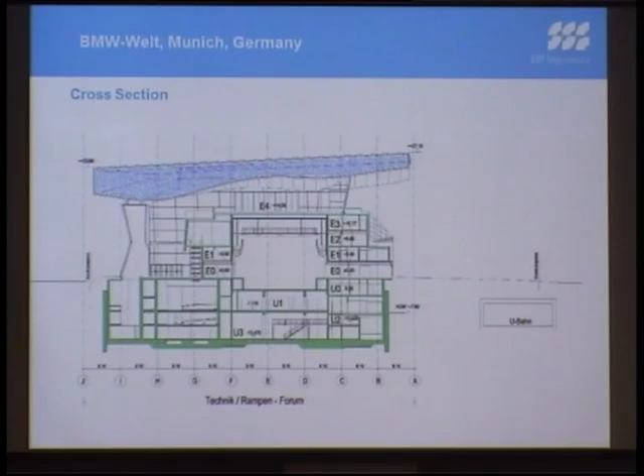From the structural point of view, there's the underground building with quite a complex excavation pit in the beginning. We have very high uplifting forces, so we even had to anchor the whole building downwards to avoid uplifting due to water and hydraulic pressure.

Then on top we have that complex 3D truss structure, which is a little bit separated into that cone and the roof. For the roof, it has to be mentioned that it's not only floating from the architectural point of view, but really floating, because there are no pillars or columns in that hall. So it has to carry between the very left side where the double cone is, and in the back where there's some concrete structure where it could be beared, and the other side where there's a conference center - in between there's no column at all.

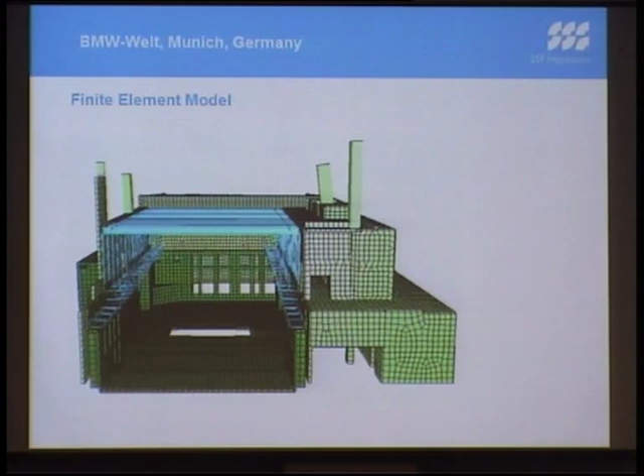Calculation has been carried out using SOFiSTiK software again. On the one hand side, traditional finite element for the concrete part, and then of course for the steel part, for the 3D truss structure with a bar structure.

This project started about 10 years ago, and at that time the tools were not as strong as they are today. It was still calculated using STAR, a simple model for the bar structure in SOFiSTiK. The structure was initially designed with Revit, but at that time there was no interface between Revit and SOFiSTiK, so it had to be transferred via Excel sheets with a very, very long list of knots and bar elements.

Now in construction stage, as an engineer, we have to show it in construction stage because that is what is interesting, because we see the roof and the structure inside it. Later on, for architectural reasons, there was cladding and a facade added. Nowadays, unfortunately, you don't really see that beautiful structure which is inside - it's all hidden behind facade elements.

This is a double cone, the lower part of the double cone, complex 3D steel structure. This is, as I mentioned before, a part of the concrete structure where the roof is connected for load bearing.

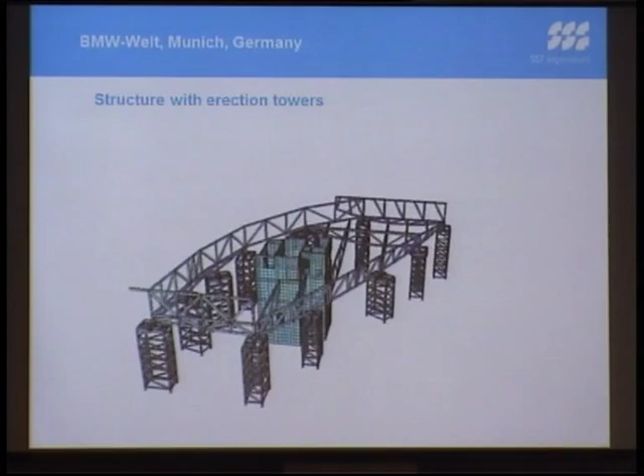And now, how to erect all these? There were a lot of temporary steel towers to be able to build the roof and assemble the parts of it. Only at the very final stage, when all the parts had been assembled and it really worked as a truss structure, these steel towers were taken out. Now, with very little vertical elements, the roof is floating - the architect's idea was for it to appear floating over the hall.

As I said before, the structure has only been seen during construction, because that is how it looks nowadays. It's beautiful, interesting architecture, but all the engineering inside is today unfortunately hidden behind cladding elements. However, I think the person taking his brand new BMW car there will be very happy.

A last project - I think we are running out of time, so maybe I should just skip that one. And...

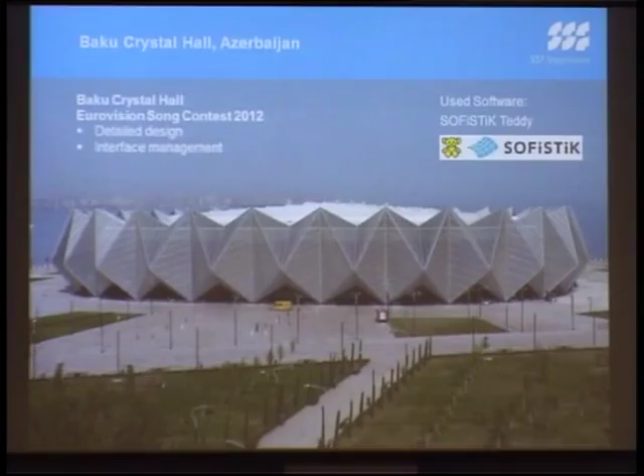Just a few words - it was a very interesting project we ran in Baku, Azerbaijan. We had the chance to build a stadium for the Eurovision Song Contest. As the country that won the competition the year before, they had to build a stadium and run the competition the next year. For that project, we only had 8 months to design and build the whole stadium, so it was quite a rush and quite a challenge from a timing perspective.

I'll just go through this quickly and take the occasion to give a little outlook. As we're here today in St. Petersburg, I'll give an outlook on one project we just started working on: the Zenit Stadium here in St. Petersburg, a soccer stadium for the local team. Probably you know better than I how good that team is in soccer - I'm not aware of the team that will play there.

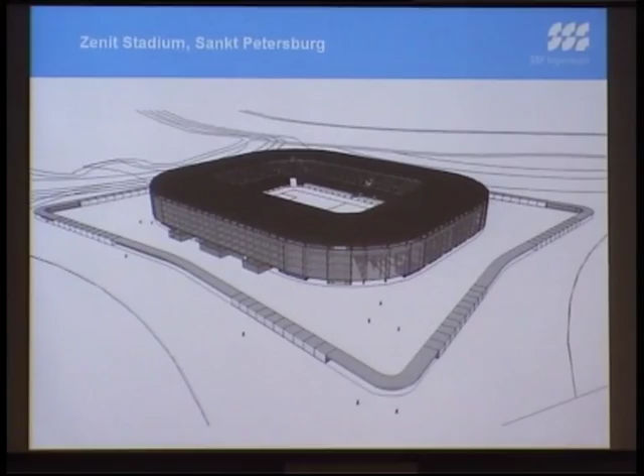We did some first analysis for this stadium, and we would be very pleased to continue our work here in St. Petersburg. That's why we would be quite open and interested in discussing these kinds of projects in Russia generally. As I said in the beginning, Russia is a very interesting market for the future - there will be a lot of projects here, which I think is very challenging work for all the engineers working here. We would be happy to be a partner and cooperate on these kinds of projects, and to continue not only our presentation today but discussion and cooperation with you in the future.